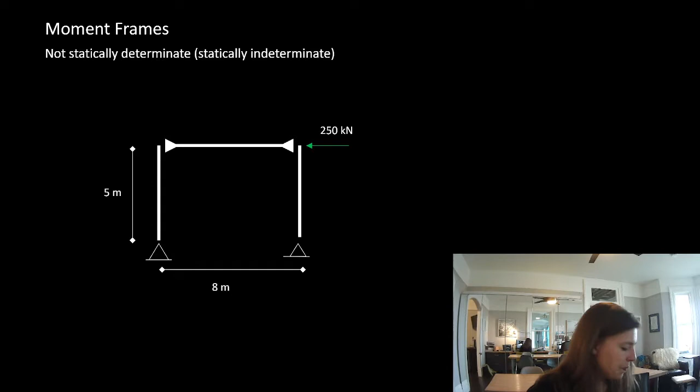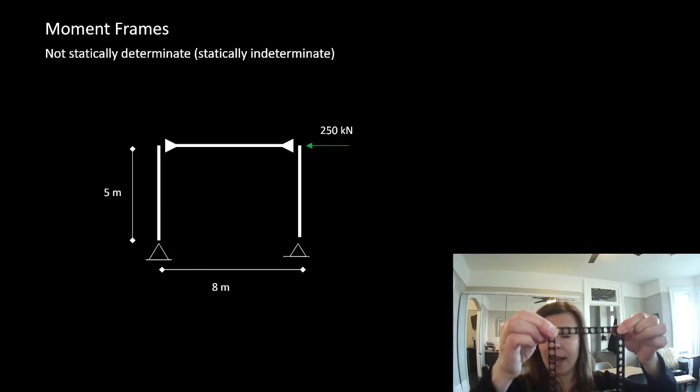If this was our braced frame, say we take this brace out. That's not very good, because if this is what's holding the building up and we take it away, we've got a problem. So what we need to do is essentially glue these joints together. Right now these are pins, and you can see how they don't prevent rotation, the angle changes. So we're talking about gluing here and here, and if we glue those together, we have a moment frame now. I don't have a way to actually build one where those get glued together to prevent rotation, but that is a moment frame.

We have 250 kilonewtons applied to it, and 4 reactions at the bottom: two gravity reactions in the y direction, but also two in the x direction. We only have 3 equations available. For the braced frame, there was no way to have an x component at that base, so we technically only had 3 unknowns since those could only take axial loads. Here we have a moment connection, so we'll actually have 4 unknowns down here, meaning this is statically indeterminate - we have more unknowns than equations.

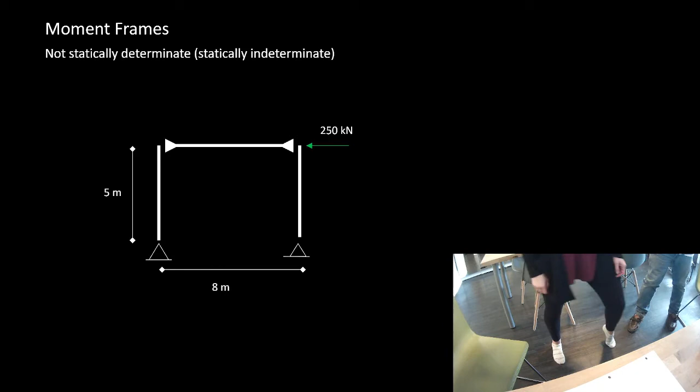Now if we look at this, what can you guess is the issue here? Actually Dave, can you do me a favor, can you push me right here? If Dave's pushing me, I can feel both of my feet are engaged. If I went up on my tippy toe on this side, things start to get a little bit different. Thank you, I thought that was going to be more effective, but it was not.

But you know that your feet are sharing out that friction load. Think of this X reaction as a friction load here. There might be something more physical there, but it's the same idea.

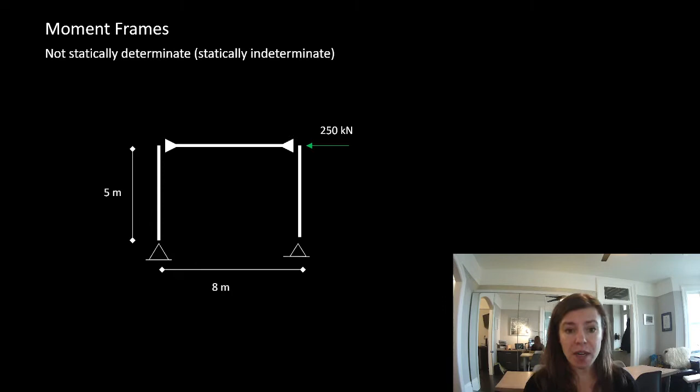We're going to make an assumption that the X component of these reactions are equal. As an experienced engineer, I'm telling you that most of the time that is true, and I'm going to show you using modeling software later in this lecture when it isn't true. This problem is probably true, but we're going to start with the base assumption that it is. I know you're thinking: you're telling us to assume something is true, then later you'll tell us when it's not. Hopefully it'll be clear when I explain what makes it not true. Most of the time it is true, and in a little bit I'll explain when it's not.

So let's go through what we know about solving problems with method of sections. We did this as a braced frame a few weeks ago, and now we're going to solve it with the moment frame.

Let's take a look at our problem set here. I need to put my hair up because it's getting absolutely ridiculously long, and I'm lazy, so I don't go to a hairdresser ever. All right, you guys are all gonna forever think about that wacky teacher that talked about all of that nonsense. I guess it's something, right?

Let's draw out our frame here. We know that there's a moment connection here. When we draw this pin, we tend to leave a little bit of a gap, but we know this is a moment connection. For a moment connection, we'll often draw solid filled triangles, just to remind ourselves that they're glued together here.

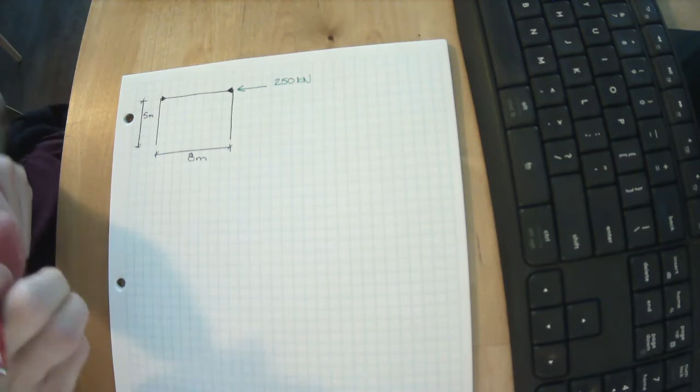We know we have two pinned reactions here: RY1 and RY2. And we know we have two X reactions here, RX and RX, and we are starting with the assumption that RX equals RX. We're dividing the reaction equally between these two. We're saying we think these two things are going to share the load equally, whatever that load is, we're saying we think we're going to have those shared equally. This is our assumption.

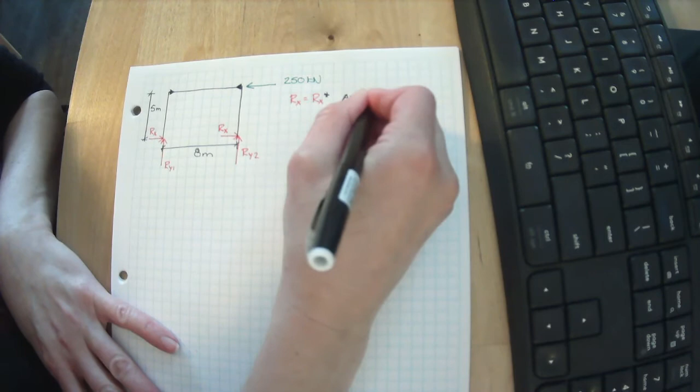This is going to allow us to only have three unknowns, because look, we have RX and RX, RY1 and RY2, so we only have three unknowns, which means we can make use of our three equations. I know, crazy, I'm telling you to take this on trust a little bit. There are ways to do this problem solution set not assuming these share out equally, and I'm going to show you that under certain circumstances, if we go through that long, hard, complicated way, we will see that in certain circumstances they are equal to each other.

So let's go through - what's the very first thing we do with this? Right, we solve for our reactions.

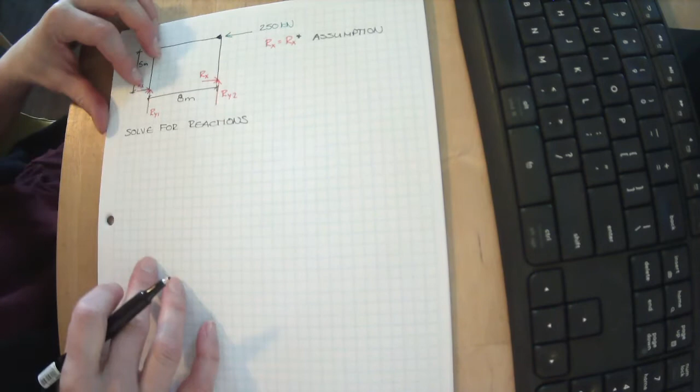Sum of the forces in the X direction, where everything going in that direction is positive, and we want this to be in static equilibrium, which means it's not sliding back and forth, so the sum of all the forces has to be zero in that direction. We have Rx plus Rx minus 250 equals 0. So we have 2Rx, bring that over, make it positive, divide the 250 by 2, and we get Rx equals 125 kilonewtons.

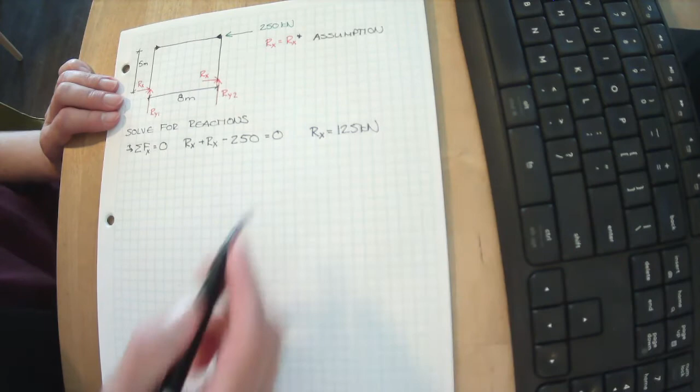Essentially, that's the assumption we made. We said we're going to share that load, that 250 kilonewtons of sliding, out as a reaction equally on each side here.

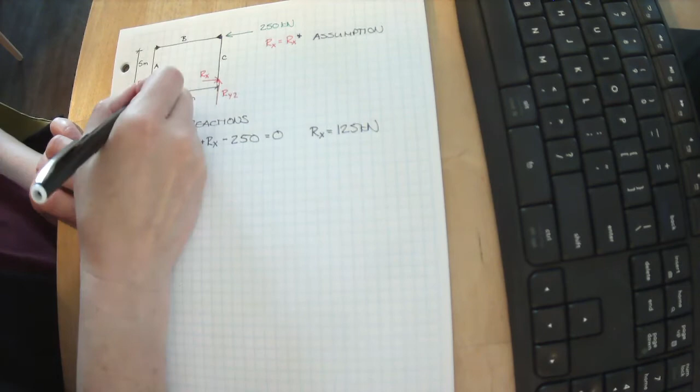Now let's sum the moments about the z-axis where everything spinning in that direction is positive. Do you know what I didn't do here? What I like to do with trusses or braced frames or moment frames is label out my members. So let's call this member A, this member B, this member C. We'll call this node 1 and node 2. This is RY1, RY2. And let's call this node 3 and node 4. That's just to help us think of that as an accounting process, to help us keep track of our numbers because it's so easy to lose track of things. You've seen me do it, I'm sure you guys have done it.

It's a very frustrating feeling when you've done everything right, but made some silly little mistake—you get the wrong answer not because you don't understand the process, but because of a simple numerical mistake. Unfortunately, because everything is online, it's hard for me to award points for that. Normally, I used to go through and visibly look at assignments and exams for those problems, but being online, that's hard to do. So we have to be really precise, more like it would be in the real world.

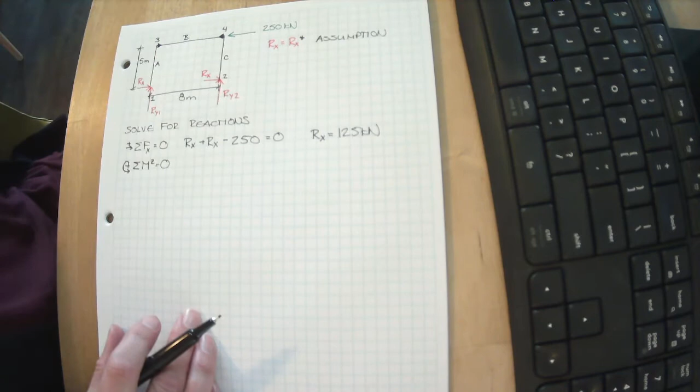Let's spin about node 1. Let's assume we're putting our imaginary thumbtack right here—that's where it is. RY1 passes through our thumbtack, and RX passes through our thumbtack too, leaving us with 250 kilonewtons and RY2 trying to make this spin. The 250 kilonewtons is trying to spin this in this direction.

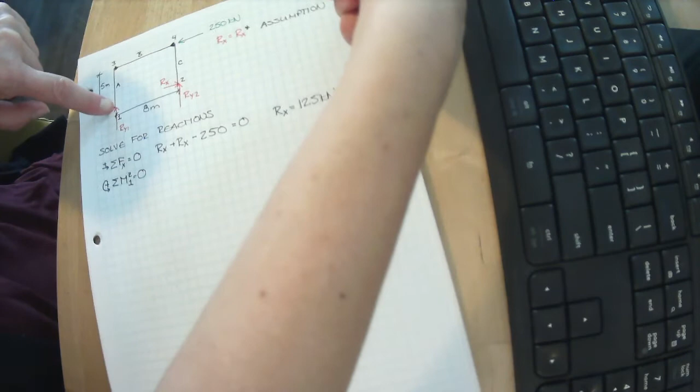Let's follow the path of the 250 and see how close it gets to our node. It follows along this path, going along this track, and gets 5 meters away from our thumbtack, which is right here. So it's trying to spin in that direction. Curl my fingers in the direction it's trying to spin it, and my right hand tells me if my thumb is in the positive direction, then it's a positive moment.

So plus 250 times 5 meters. I also have RY2 trying to spin this—it's trying to spin it in that direction, which is positive, so plus RY2 times its distance away, which is 8 meters.

We only have one unknown in this problem. We can rearrange this and solve for RY2: 250 times 5, bring it over, make it negative, and divide by 8. That gives us 250 times 5 divided by 8, minus 156.25 kilonewtons. The minus tells us that we assumed wrong.

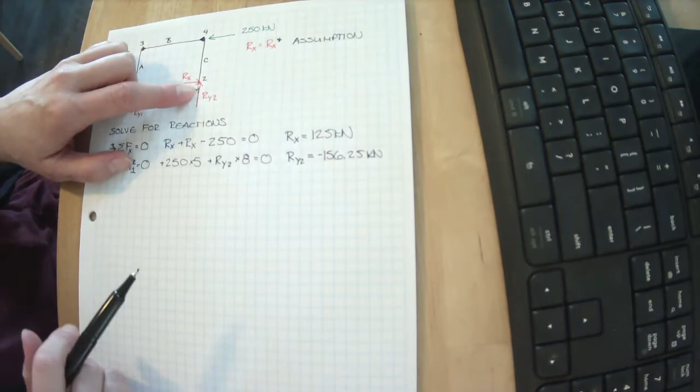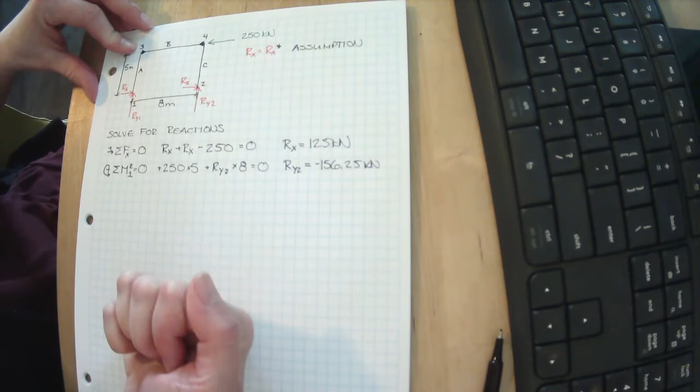We assumed that this was in compression right here, or that this reaction was a supporting reaction. Instead, it looks like it's trying to hold it down—this is trying to kick up, and so we're pulling down at this spot. Again, if you stood up and had someone push you, you could feel that with your feet.

Let's now sum our forces in the y direction with everything upwards being positive, and we want this to be in static equilibrium—we don't want it to move up and down, so the sum of all those forces must be 0. There's 3 ways to say the same thing. We have RY1 going upwards, we have RY2 going upwards, but we've calculated that it's minus 156.25.

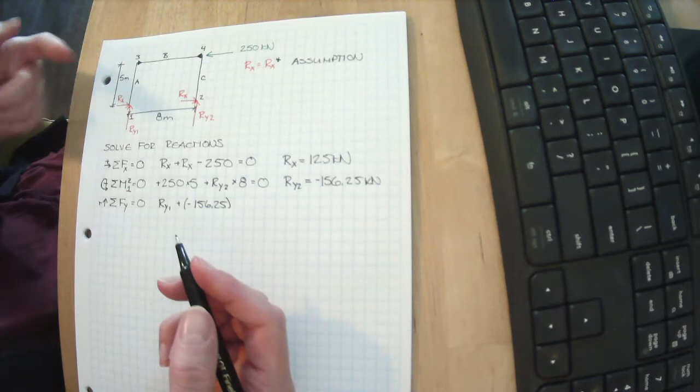That's it, it's only our reactions. So that means RY1 equals plus 156.25 kilonewtons. So this load gets shared out between those two as a reaction in the x direction.

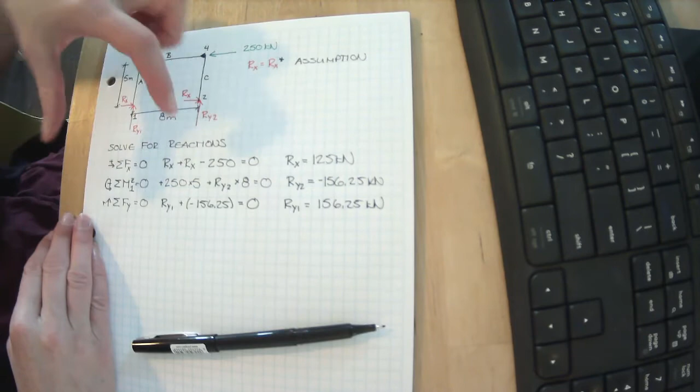And then here, this side's trying to kick up, this side's trying to push down, and they're equal and opposite forces.

Sorry, thank you. No problem. The students all thank you. Say thank you, Dave. Okay.

Now let's start the fun part—let's start method of sections. Let's do method of sections, cutting through member A, some unknown distance through member A.

There's our member A. We know at A we have a reaction of 156.25 kilonewtons and 125 kilonewtons. And that's it—those are the only applied loads if we're cutting here.

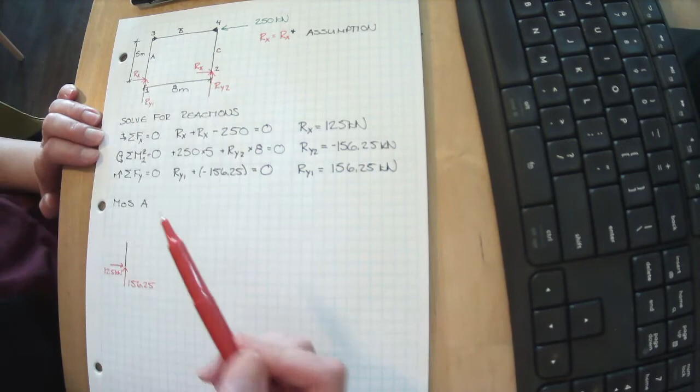I'm going to work around this frame, cutting through A, then cutting through B, and cutting through C. You could go the other way—that's totally fine, you'll end up with the same answers. But I'm lazy and I like to have a method, so I'm going to cut through A and get rid of all of that, then cut through B and get rid of all of that. Basically, I'm always going to keep the left-hand side.

But we know that something must be holding this in place. This is in static equilibrium, which means this must be in static equilibrium. So what's happening at this point right here internally on this member to make sure it's not flying off in space or spinning? Something is happening there.

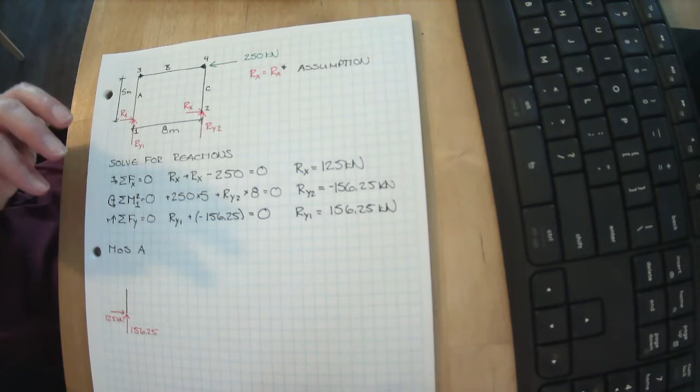So what could be happening there? We know that there could be 3 different internal forces: shear, moment, and axial. In trusses, I told you we were only looking at axial loads, and in our beams, we were only looking at bending and shear. This one's slightly more complicated in that we can have all 3 things happening in it.

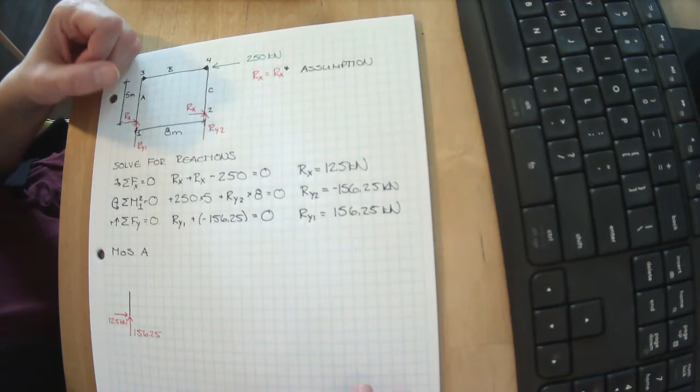How would you know when to do that? Well, some of that comes with practice, but I'll tell you: if you have moment connections on things with a force in the other direction or along its length, you'll end up with 3 types of forces internally on things. That's beyond you to figure out right now.

I'm telling you we can have all 3 on this. I always draw my unknown axial force as a tension force, so that's my unknown tension A. I always draw my unknown shear like that, and I always draw my unknown moment spinning in the positive direction. So I have 3 unknowns here. Lucky for us, we have 3 equations to solve this.

All right, let's start with summing the forces in the y direction, where everything upwards is positive. We want to know what it takes for this to be in static equilibrium, or for the sum of all the forces to be 0.

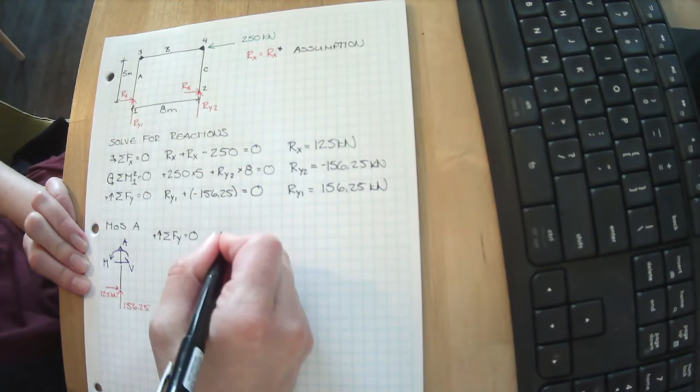Okay, well, we have A going upwards, and we have 156.25 kilonewtons going upwards, and that's all that's going in the y direction. We can rearrange this, and A equals minus 156.25 kilonewtons. We assumed A was in tension, so this negative tells us we got it wrong, and A is actually 156.25 kilonewtons in compression. I think intuitively you can understand that.

If you were standing here with your legs like this and someone pushed on you, you can feel that this leg is pushing down and this leg is trying to lift up, meaning this would be in tension and this would be in compression. So I think intuitively that matches what you'd expect. This is why, before you start solving anything, you should take something and play with it, see what you think is going to happen.

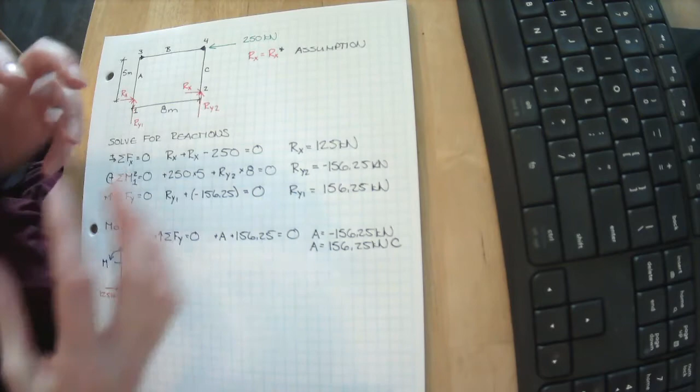Okay, let's sum our forces in the x direction, where everything going in that direction is positive. We want to know what it takes for this to be in static equilibrium, or for the sum of all the forces to be 0.

Okay, well, we've got our unknown shear in the positive direction and 125 kilonewtons. We can rearrange this, and V equals minus 125 kilonewtons.

Remember, for shear, positive or negative doesn't really have much meaning. It's important for tracking our data, but when we're looking for maximum values, the absolute value is what we care about. With axial, it tells us whether tension or compression is what we have, which is really important. You're going to see that next term, when we do our capacity of things, that axial, whether it's tension or compression, has a real impact on things, but positive or negative shear doesn't.

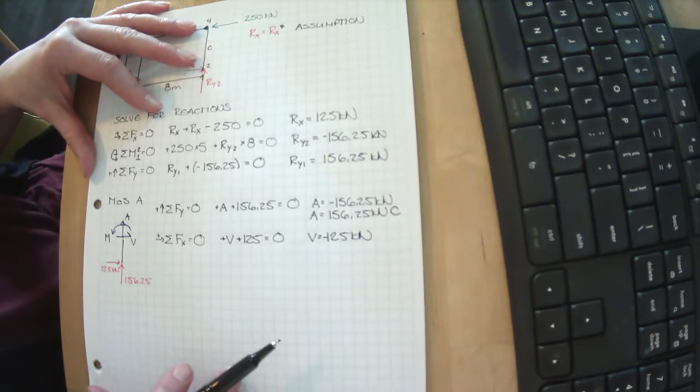We like to keep track of it while we're solving our problem though. All right, and the third one: let's sum our moments about the z-axis, where everything in that direction is positive, and we want to know what it takes to be in static equilibrium.

And we have cut this some distance x. Being lazy, I always solve my method of sections at the cut, so I put my thumbtack at x. So I'm cutting this at x, and I'm putting my thumbtack here. Well, my unknown shear passes through it, so it doesn't cause it to spin.

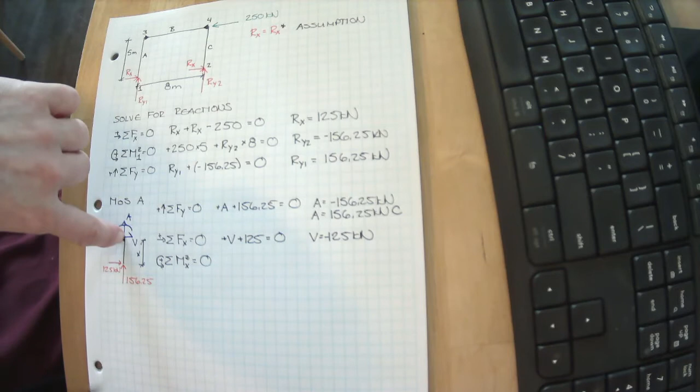A passes through it, and 156.25 passes through it. So I've gotten rid of A, this value, and V, because they all pass directly through the point of my thumbtack. To be a moment, you need a force and an eccentricity, or a distance away, so those ones cannot cause a moment about a thumbtack right here.

What we're left with is 125 kilonewtons, trying to spin our element in that direction, which is positive, and our unknown moment trying to spin it in a positive direction. So we have plus moment plus 125 times... remember, to be a moment, you need a value and a distance. Well, our distance is x.

We can rearrange this and solve for m. M equals minus 125x kilonewton meters.

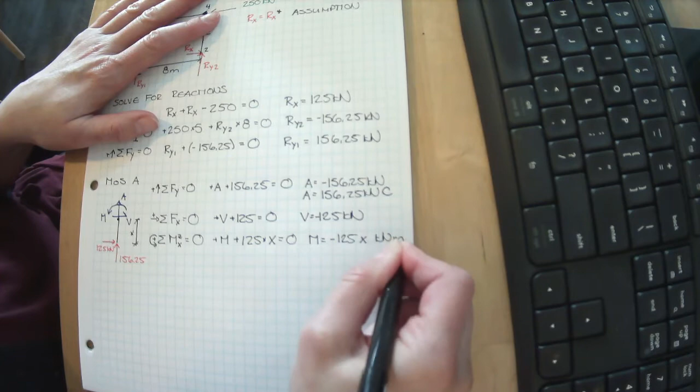Well, let's just plug in a few values here. What is m at 0? Well, m right here at x equals 0, 0 times 125 is 0. M at 2.5 — if x was 2.5, we have 125 times 2.5, so minus 312.5. And what is m at 5 meters?

Remember, this thing could be 5 meters long.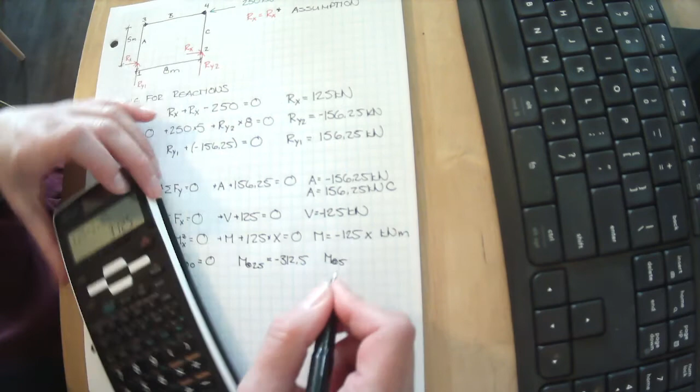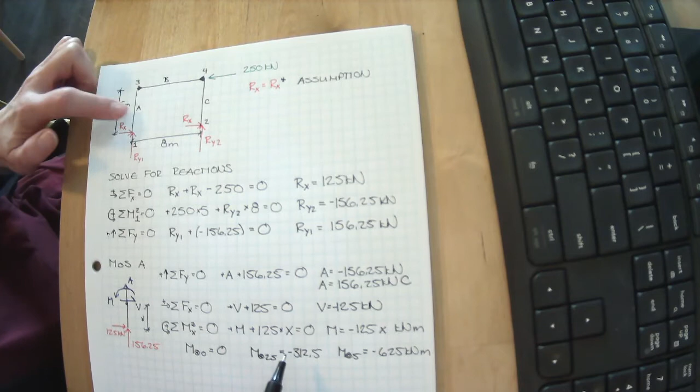125 times 5 is minus 625 kilonewton meters. So we now know what the moment is anywhere along member A, and we can see that it's highest right here where it connects to member B. Remember, if there's a moment there, it has to go somewhere, meaning there needs to be a moment connection between these two things. So now we know we'd have to design this connection for at least 625 kilonewton meters.

Let's do our second section. Let's do method of sections on B. We're going to cut some distance x along member B now. I'm going to cut this at some unknown length along B. This is 5 meters, and this is distance x.

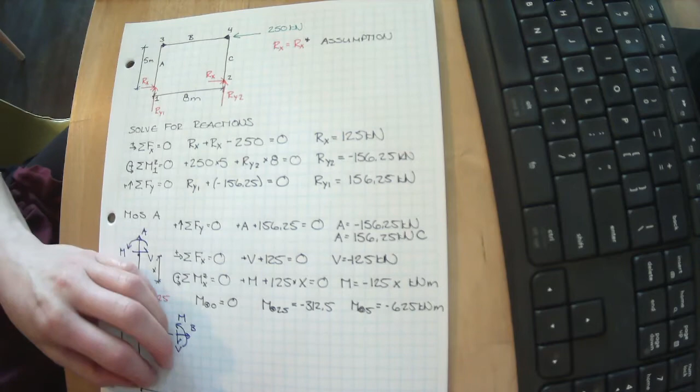We know that we have a reaction here of 156.25 and a reaction here of 125 kilonewtons. And there are some unknown internal forces here: an axial force, a shear force, and a moment. Those three things are unknowns. We know that this object as a whole isn't moving or spinning, so this section of it can't be moving or spinning because the other part of it is holding it in place. So internally, there must be something happening on that member, and this is how we can find those internal forces.

Let's sum our forces in the y direction, where everything upwards is positive. We have 156.25 going upwards, and we have V going downwards. Those are the only things in the y direction, so it's negative. We can rearrange this, and the shear along B is 156.25 kilonewtons. It's independent of the length of B, so everywhere on B, the shear is 156.25 kilonewtons.

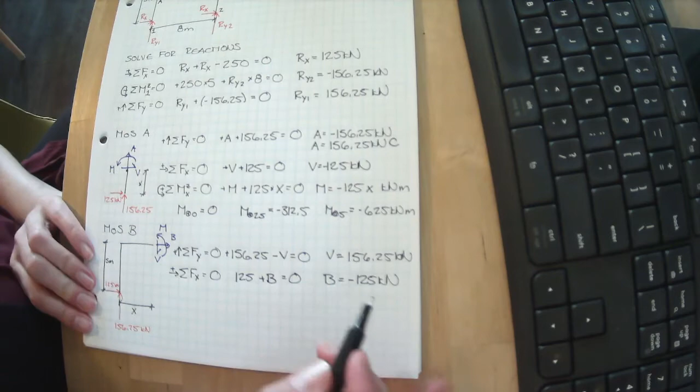Let's sum our forces in the x direction. We've got 125 kilonewtons that way, and we've got B going in that direction, and those are the only things in the x direction. So we can rearrange this, and B equals minus 125 kilonewtons. We always assume everything's in tension when we're drawing it, so a negative value tells us we assumed wrong - that's a handy way to remember negative always means compression. So B equals 125 kilonewtons in compression.

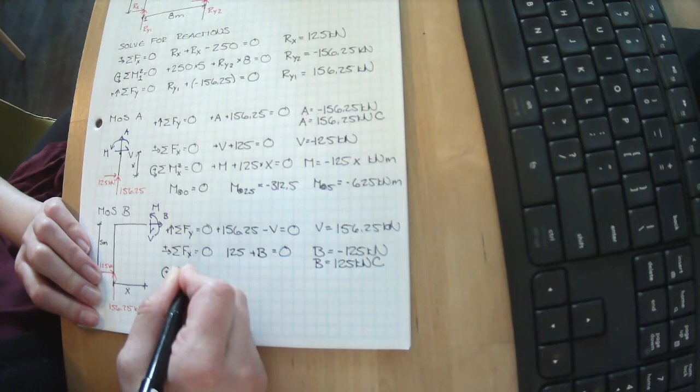We have one last handy dandy equation for us. We need to find that internal moment. So let's sum the moments where everything spinning in that direction is positive. We're going to spin it about the z-axis, and we want this to be in static equilibrium. Let's pick point X to put our thumbtack - I'm lazy, I always do it at my section cut. If I put my thumbtack right here, shear passes through it, so it doesn't cause it to spin. And the axial load in member B passes through it, and it doesn't cause it to spin. So I have my unknown moment, which is what we're trying to solve for.

So plus m, putting my thumbtack here. We have 125 kilonewtons trying to make it spin in that direction. Curl the fingers of my right hand in the direction it's trying to spin, my thumb tells me that's positive. So plus 125 times - this is the line of action of that 125 kilonewtons - it passes 5 meters away.

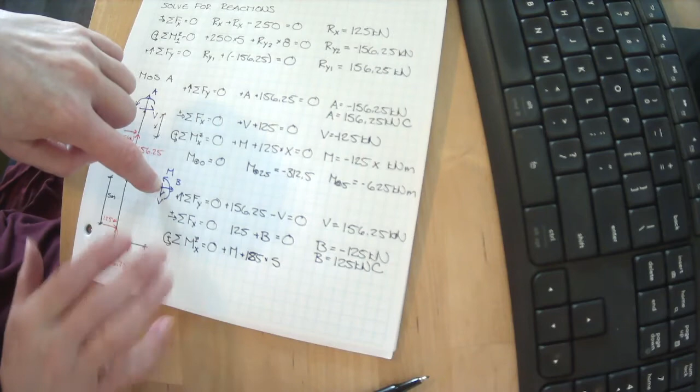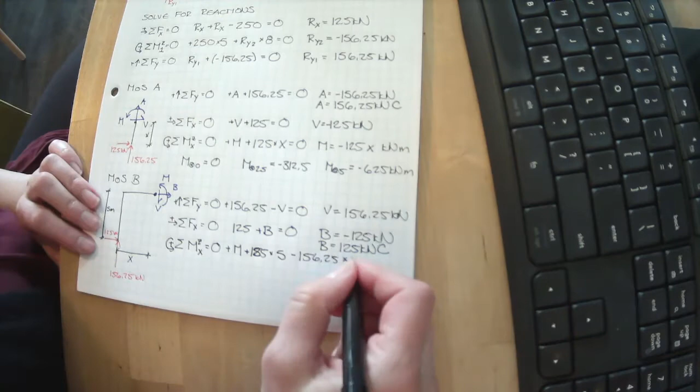Then I have 156.25 kilonewtons trying to spin it in that direction. Curl the fingers of my right hand, point my thumb - it's pointing into the page along the z-axis, so that tells me it's a negative moment. So minus 156.25 times x away, that's the distance - the closest it passes is along this plane right here. So times x. We can rearrange this, and we can solve for m equals 156.25x minus 125 times 5, or 625 kilonewton meters.

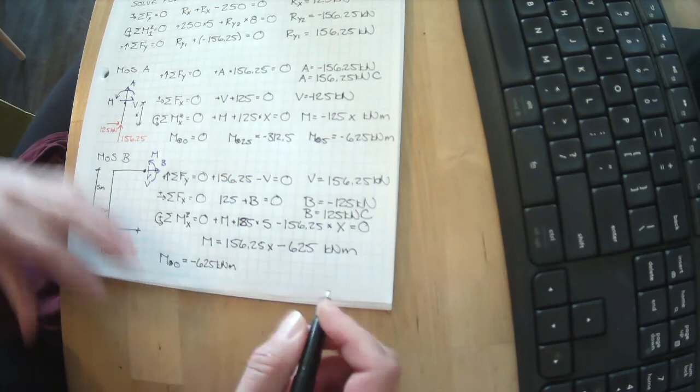So our location has an impact on moment. Let's test it at a few spots. What's the moment at x equals 0? If x equals 0, we have 156.25 times 0 minus 625 kilonewton meters. What's the moment at x equals 4 meters, halfway - remember this was 8 meters long? What happens at the midpoint here? 156.25 times 4 minus 625 equals 0. We have 0 moment at the midspan of that member.

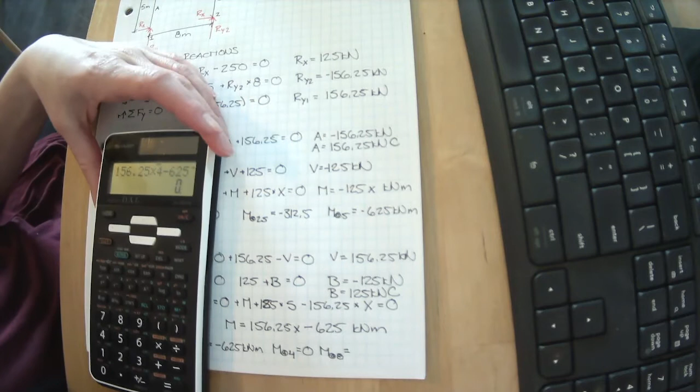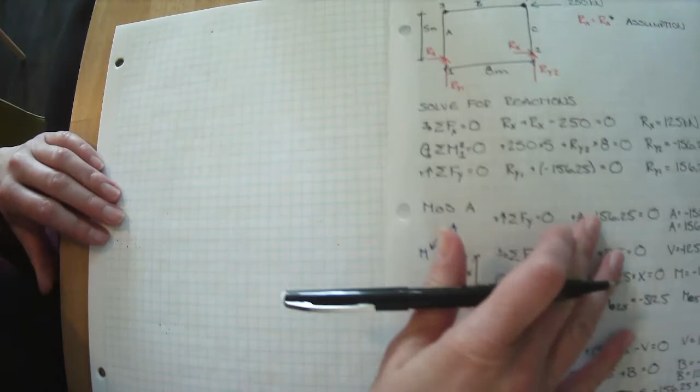Let's check it at x equals 8. So let's see what happens when we have 8 as our distance x. 156.25 times 8 minus 625 gives us 625 kilonewton meters. So we've got some information now for what the internal forces are along member B. We have one more member left - we need to know what happens along member C. So let's put this right here so we have quick access to it.

Method of sections on member C. All right, 1, 2, 3, 4, 5. 2, 3, 4, 5, 6, 7, 8.

And we're going to cut it somewhere along member C. This is 8 meters, this is 5 meters, and this is our distance x. Remember, I'm going around it like this, cutting it. So this is x equals 0, and this is x equals 5, because I've gone through and cut it in that direction.

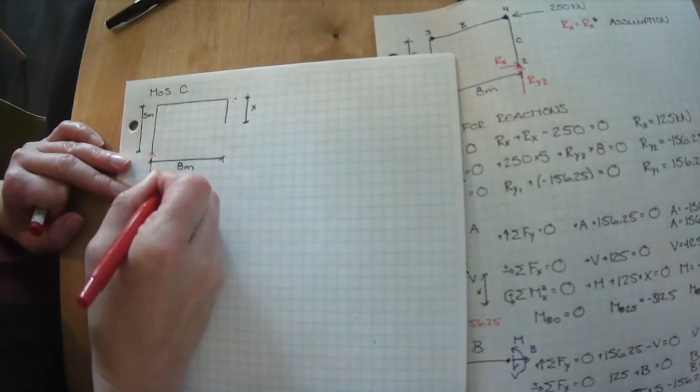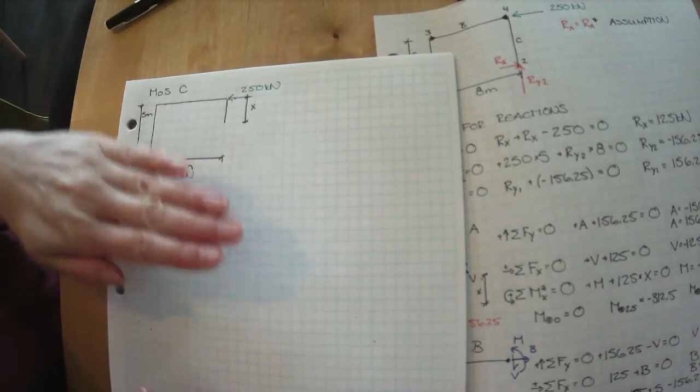We know there is a reaction here of 156.25 and a reaction here of 125 kilonewtons. And we've cut past the applied load now, so we know there is also 250 kilonewtons of applied load on this moment frame. And this is not sliding in space or spinning because this whole isn't.

So what's holding this portion in place? Well, the rest of this is what's holding it in place. So there must be some internal reaction or internal forces holding this in place. I always assume everything is in tension, so an unknown axial force of C. We have an unknown shear force, V, and I always draw my unknown moment in the positive direction. So now we can solve for these internal forces for anywhere along member C.

Let's do the same process. Let's sum our forces in the x direction with everything going in that direction being positive. We want to figure out what it takes to be in static equilibrium. Well, we have 125 kilonewtons going in the positive direction, we have 250 kilonewtons going in the negative direction, and we have our unknown shear going in the negative direction.

We can rearrange this. V equals, bring V over to the other side, 125 minus 250, we get minus 125 kilonewtons. Remember, for shear, we don't put a lot of stock in positive versus negative, but we need to be able to keep track of things. So we'll keep track of it, but when we ask about maximum values of shear, we don't care about positive versus negative. It's the absolute value we care about.

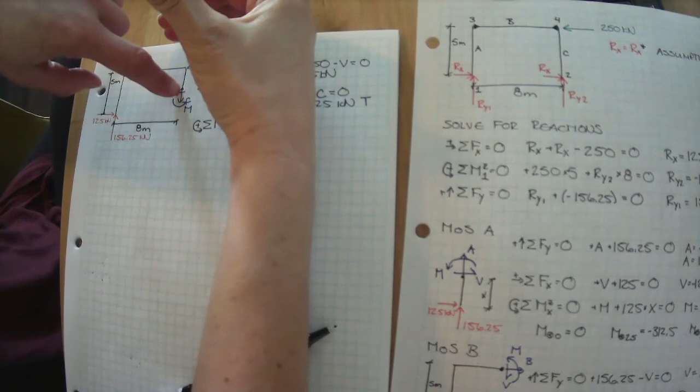So let's start with our unknown moment. We always tend to draw it in the positive direction, so plus M. We've got our 250 kilonewtons trying to spin it in that direction. Curl my fingers, my thumb tells me that it is spinning in the positive direction. So plus 250, and it is x distance away. I'm going to write this down here just to give us a little more room: M plus 250 times x.

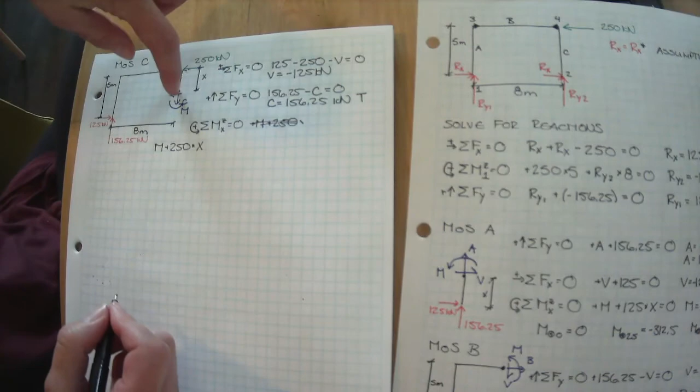We have our 156.25 trying to spin it in that direction. The thumb of my right hand tells me that's the negative direction. So minus 156.25, and it is taking place 8 meters away, so times 8 meters.

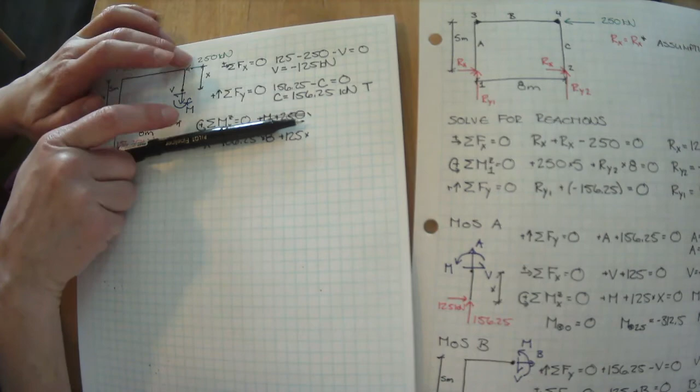Okay, we have our 125 trying to spin it in this direction. Curl the fingers of my right hand, that tells me it's the positive direction. So plus 125 times this distance. Look, it passes this distance away. So if that's the line of my force, it's passing that distance away. Well, that distance is 5 and that distance is x, meaning that distance is 5 minus x. And those were all the things trying to make it spin: 1, 2, 3, 4 things. Okay, it looks like we can do some math here. All right.

M equals, let's bring everything over to the other side: minus 250x plus 156.25 times 8, so plus 1250, minus 125 times 5, which is 625, plus 125 times x. I multiplied this out, but then brought it to the other side of the equation, so it changed the signs. So 125 times minus x, bring it over, became positive 125x. We can simplify this: M equals minus 125x plus 625 kilonewton meters.

Let's see what that means at various points along the length of this. Let's check M at x equals 0. Remember, this is 0 because we're cutting along this length, this is the length we're cutting here, so this is distance x. That's when it's 0, that's when it's 2.5, and that's when it's 5 meters.

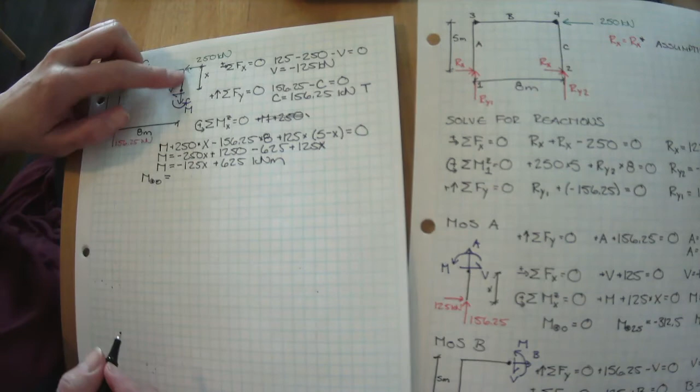At x equals 0, which is right here, we have minus 125 times 0 plus 625, so 625. M at 2.5: we have minus 125 times 2.5 plus 625, gives us 312.5 kilonewton meters. And then M at 5 would be minus 125 times 5 plus 625, gives us 0.

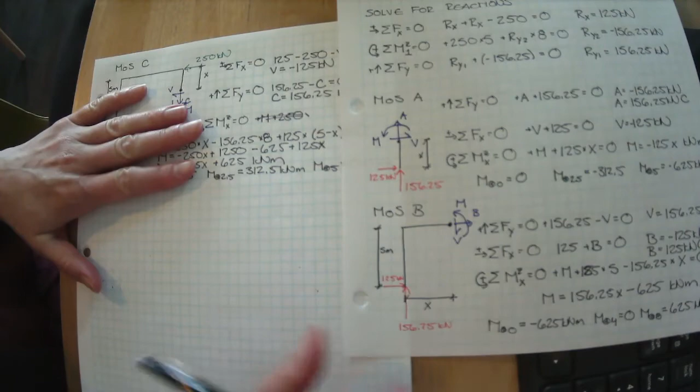Okay, so we've got a lot of data about what's happening internally on this frame here, this moment frame, but I find that a little bit difficult to look at. Let's maybe draw a little set of summary diagrams here.

Let's draw our free body diagram. We'll make this one our free body diagram, we'll make this one our axial force diagram, and we'll draw our shear force diagram. I'm just going to put a note that I'm going to draw that in kilonewtons. And we'll draw our bending moment diagram, and that's going to be in kilonewton meters.

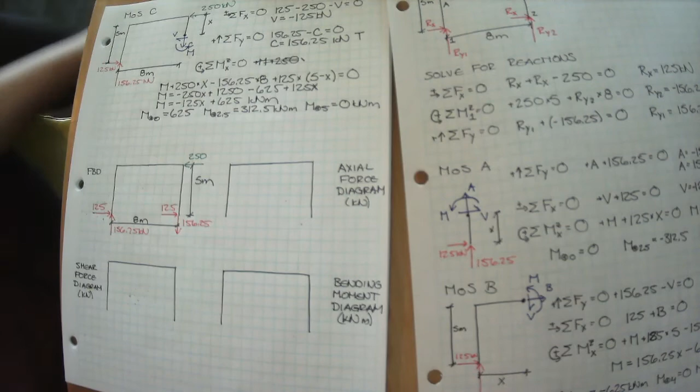Okay, so this tells us what's being applied to our frame here, and then we can start drawing our diagrams. Our axial force diagram for our columns: this column was 156.25 compression. Our beam was 125 kilonewtons of compression. So member A was 156.25 kilonewtons of compression, and member B was 125 kilonewtons of compression.

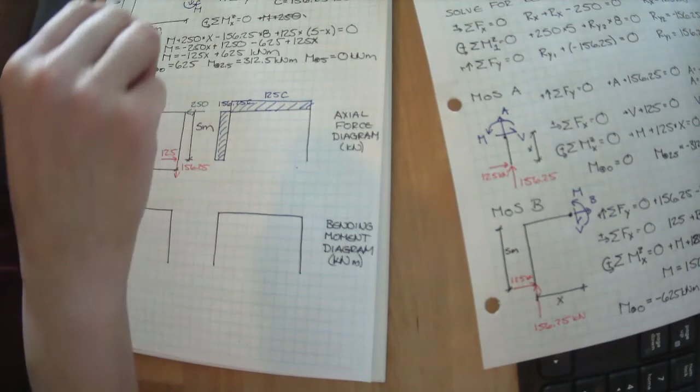And then I'll often change the color between compression and tension so it's visible at a glance. So 156.25 in tension, that just makes it really easy to see what's happening quickly. So both of these are in compression and that's in tension.

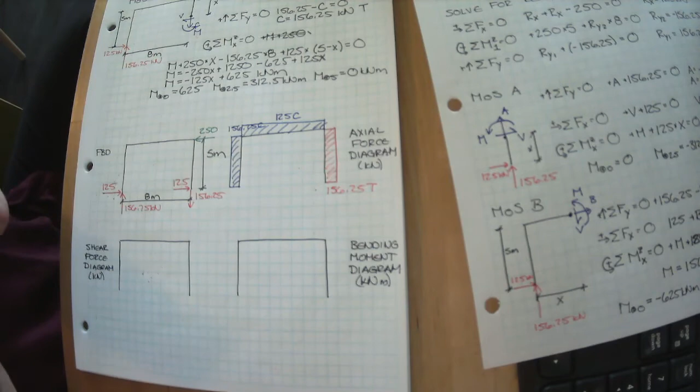Okay, let's draw our shear diagram. Member A had 125 kilonewtons of shear on it. Remember, for shear, we need to keep track of positive and negative for solving our problems, but once we have it, we don't really care if it's positive or negative. Everywhere along member B, the shear was 156.25, and in our other column, we also had a shear of 125. So that's our shear force diagram.

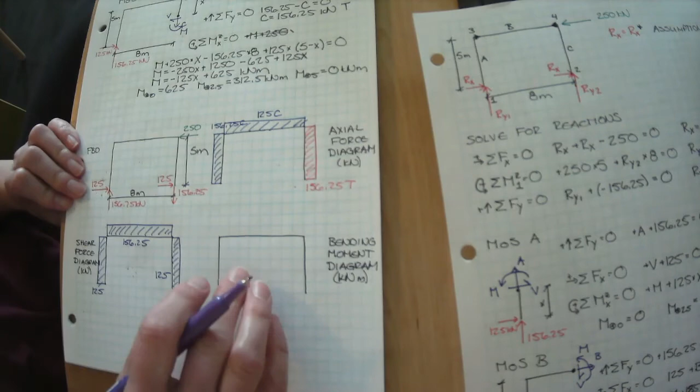And then over here, we have a bending moment diagram. On member A, we went from 0 to 312.5 to 625. Now, it was actually minus 625. Again, positive and negative moments mean a lot next term when we talk about top chord versus bottom chord of certain members. Right now, for this, it doesn't mean too much, but I'm going to keep track of it so you can see it.

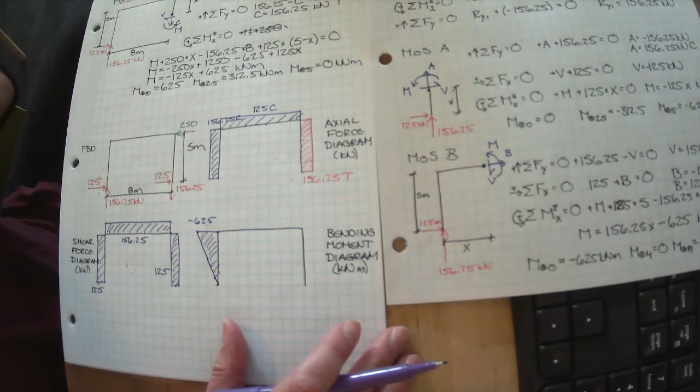The top chord, or the top member, we went from minus 625 to 0 to plus 625. And then our final member was 625 at x equals 0, and we went down to 0 moment at x equals 5. So as we wrap around this frame, we now have an image of what is happening everywhere on this frame.

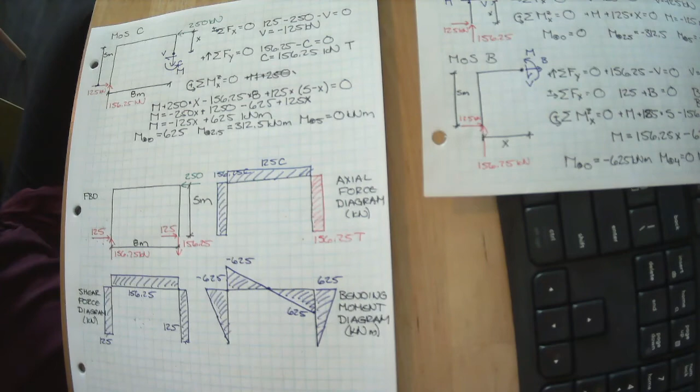So it looks like our columns are always doing something similar to each other, while our beam switches up the shear and axial forces. At a quick glance, somebody can see a lot about what is happening to this frame, which can be really handy when you're trying to make decisions about a large scale set of problems. Looking at all of these numbers, we need all these numbers to solve it, but it's hard to have a major takeaway. These images start to give us something that really lets us have a takeaway from our problem set.

So there, we solved this system as both a braced frame and a moment frame. So let me turn this back up. Well, first let me make this small.

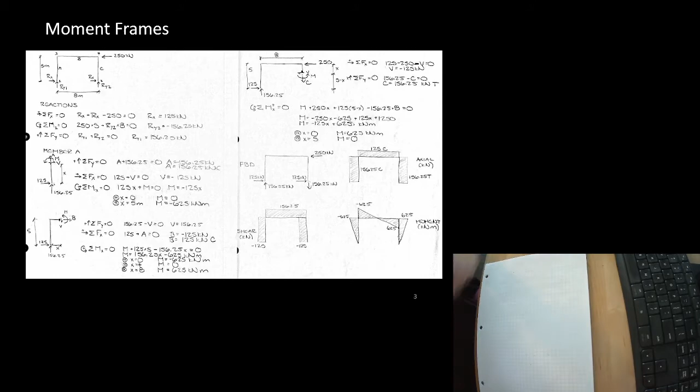And then we'll bring this back up. Okay, all right, let's take a look at this.

So, moment frames. We've now solved this frame as a braced frame and a moment frame, and we saw that the braced frame only had axial forces in it, where the moment frame had axial, shear, and moment that we had to design for. Let's see what impact that has.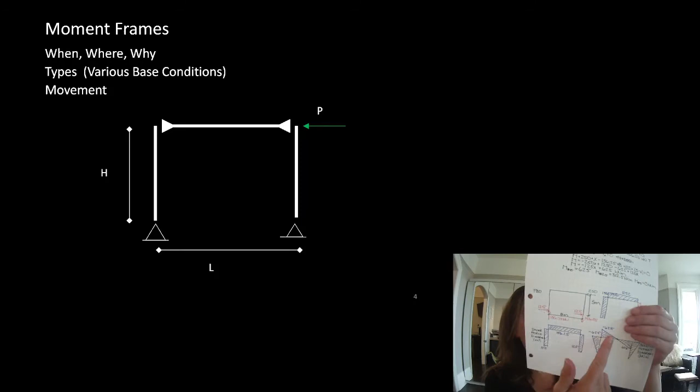Now, you guys don't know how to check the capacity of things. Next term, you'll be able to say, okay, for this member right here, I know I need a member that can handle 125 kilonewtons of compressive force, 156.25 kilonewtons of shear, and 625 kilonewton meters of moment.

But you guys don't know how to do that yet. You don't know how to pick the appropriate member. But I want to give you guys some takeaways about why moment frames are a last resort and what you can do with them. So I've gone through and taken this exact frame problem we've looked at, and I'm going to show it to you worked out with modeling software that I use under a series of conditions. So let's take a look.

So this is what I input in my modeling software. I could do all this by hand, but this does it really fast. So here's our braced frame. These little circles are just a shorthand way of the modeling software reminding me that those are pins.

So there can be no moment transfer between any of these things. No moment transfer can happen here because this is pinned to this column. These are drawn as pins, so this can only take axial loads, whereas this one, they don't show the solid triangle, but because there's no little dot, it's telling us it's moment connected, but it has pinned conditions at the base. So that means no moment can be transferred out down here.

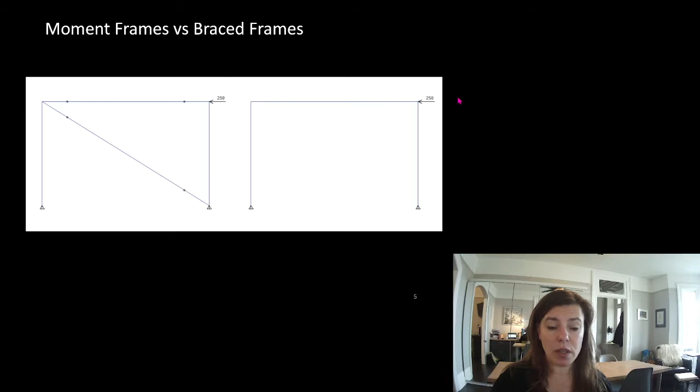They are the same dimensions, 8 meters across and 5 meters high, and they both have the same applied load. We just went through and solved these problems, and we saw that we had a reaction of all 250 kilonewtons in the x direction over here. On this one, it was divided out equally.

And we got equal and opposite 156.25 kilonewton reactions for these two things. Look at this, 124.99 and 125.00. We cheated and started with the assumption that those were equal, but that was a shorthand way of solving an indeterminate problem. What the software did was go through and check it at a series of assumptions to hone in on the one that works out. It brought into account the stiffness of the system. That's way beyond what we're going to do, but I'm going to show you some fallouts of that going forward. But you can see this matches pretty darn close to our assumption.

Right? They didn't make an assumption, they did it in a series of problem solutions. That said, they came out with our exact assumption, pretty darn close, like a slight rounding difference between them.

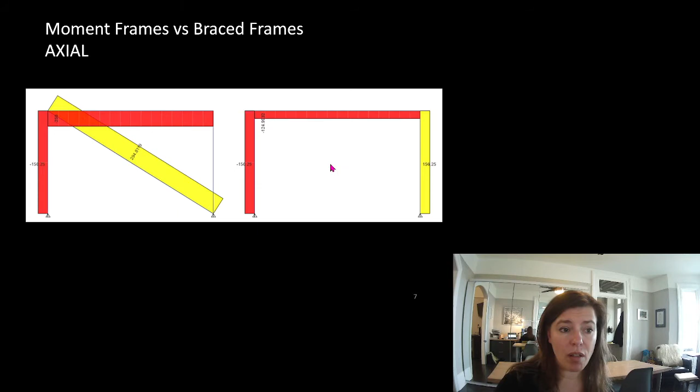So this is what we did by hand. The modeling software gives us compressive values of 250 in this, 156.25 here, and a tensile force of almost 295 kilonewtons in the brace. And then these match the axial forces we just solved. Here's our shear that we just solved. Remember, the braced frame didn't have any.

And here are our moments. Again, because they solved this not making the assumption that these were shared equally at the bottom, their moments are pretty darn close to ours. Like if I told it to round to the nearest kilonewton, the answers would be the same as ours. So there's just a fraction of a difference between ours and solving this as an indeterminate problem, just because those base shears were the tiniest little bit different.

All right, if we found members that worked for this, which is what we want to do, these two frames, for those shear force diagrams, moment diagrams, and axial force diagrams, these are the members it would take for the reduced capacity to be greater than the factored load for all of those things. What are those members? You don't care too much about that. You can see this is a lot bigger than this. And then look at this.

This is how much the systems weigh, right? If what we care about is having the cheapest system, this one—and you could use weight as a pretty good indicator of cost, which is how people price out projects during the beginning phases. That's exactly what they do. They add up all of the steel, figure out how much it weighs, and then apply a cost to it.

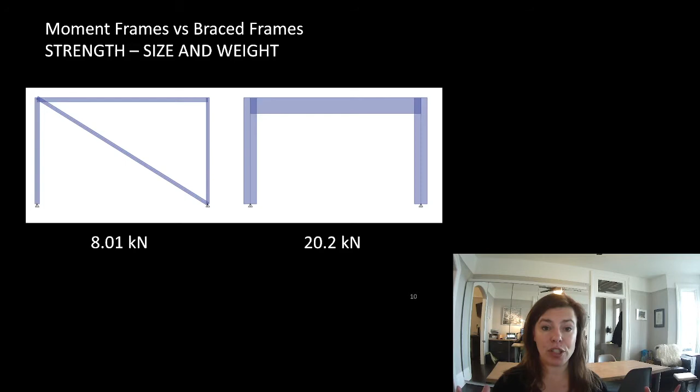Let's look at the deflected shape of these two things. Now, I'm going to show you a deflection where I've increased the scale so you can visibly see it. These are both at the same scale.

This frame deflects 8.3 millimeters, and this frame deflects 56.3 millimeters. Our height is 5 meters, and our deflection limit is height over 500, or 10 millimeters.

So this one works—just meeting the strength requirement, we also met our stiffness requirement for a braced frame. Our moment frame, however, looks like it's 5 times over for our stiffness criteria.

Now, I have said that stiffness is a strongly suggested criteria, meaning if you don't have a good reason not to meet it, meet it.

I would say probably 90% of lawsuits come over damages to finishes. So if you can say 'I met all of the criteria in the code,' you'll be safe, you'll be fine. If you choose to ignore that criteria and there's damages to finishes, you might find a client that can come after you and sue you for something.

So if you don't want to meet those criteria, you have to be very open and honest, and the owner has to understand the risk they're taking there.

So if this was just an outdoor pavilion, maybe we don't care about that criteria because there's nothing that can get damaged—like just a pergola out in a backyard. Maybe we don't care, right?

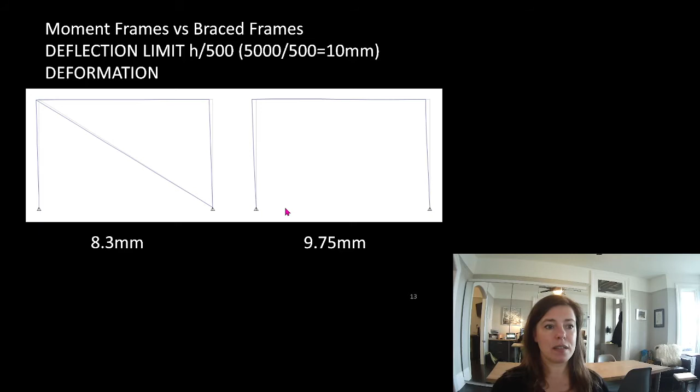But we've now met our deflection criteria, so this now meets stability, strength, and stiffness. Both of these meet strength, stiffness, and stability criteria, but this one now weighs more than 5 times the other—way more expensive. Plus, moment connections are expensive.

That alone has a cost and complexity with it. So it's not just more than 5 times—it's 5 times plus a more difficult connection.

So here's a huge takeaway: moment frames are bigger, they're heavier, and they deflect more. Even in that other case where we met the criteria, we still had more deflection—the brace frame performed even better than the criteria demanded.

So we do not start with moment frames—start with a brace frame. If you can find bays where you can put a braced frame, do that. It's going to make everyone's life simpler.

If you have no choice and you have to use a moment frame, that happens—we use moment frames, they exist and they're possible. But just try to be smart about when, where, and why you're using them, okay? I can guarantee you I'm going to ask you this question on the exam.

So let's take a look at what things we can do to a moment frame. This is what we had with our original moment frame that met strength, stiffness, and stability criteria. From now on, I'm going to try to meet those criteria. This weighed 50 kilonewtons, and I had pinned supports here.

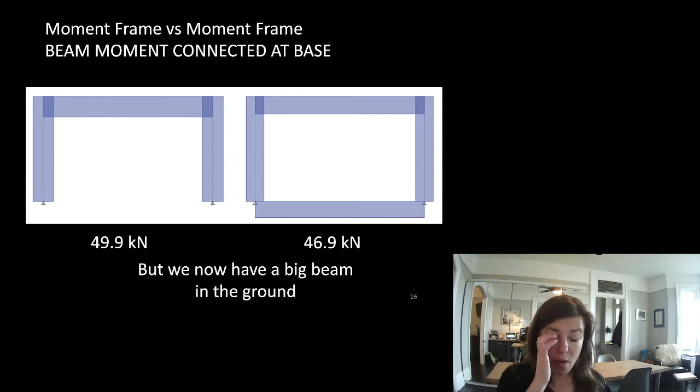Now, this is a great solution in certain circumstances. If we're trying to do a retrofit in an old building where there's existing foundations and we don't want to put the moment connection into that, and we want smaller individual members so they can simplify and do a field moment connection, this can be a really good solution. I've done this a lot on retrofits on old houses where they want to put a big bay window in the back.

Okay, remember I said we started with the premise that the reaction was equal at the bottom here. Next term, I am going to talk to you about the fact that stiffness attracts load. The stiffer something is in a system, more load will go to it than the less stiff elements. So the stiffer it is, the more load it'll attract. If these were both the same column, they would share the load equally, which is the assumption we made, that those were going to be equally stiff and share the load at the base. What if, for some reason, we had a narrower wall here and we had to hide this column in the wall? Or for some reason, we had a limit on what we could do here.

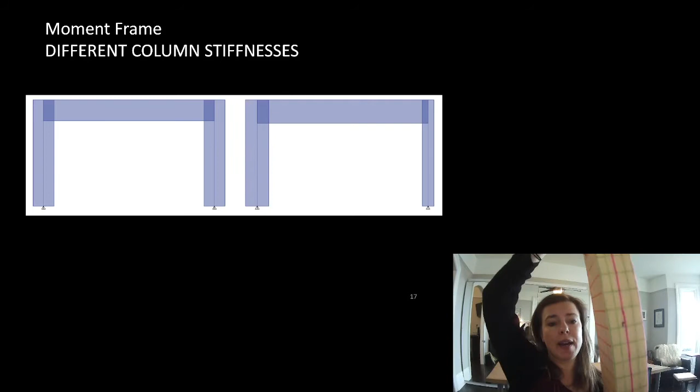You can see at a glance that if I try to bend this versus try to bend this, this is a lot easier to bend than this. So this is going to take more of the moment than this is. This is a much stiffer element than this, so more load is going to go over here.

Let's see what that does to our axial, shear, and bending moment diagrams. Well, look at the reactions here. It's hard to see, but here we have our 125 and 125. We still have our same up and down values here and here, but look at our base reaction: this one is 185, and this one is 65-ish, more or less, there's some rounding in there. But you can see that this one has a bigger base shear than this one. That would have a big impact on us tracking our axial force, our shear, and our bending moments through the frame.

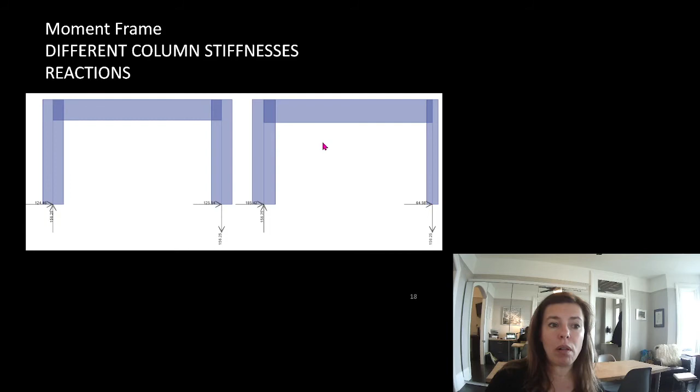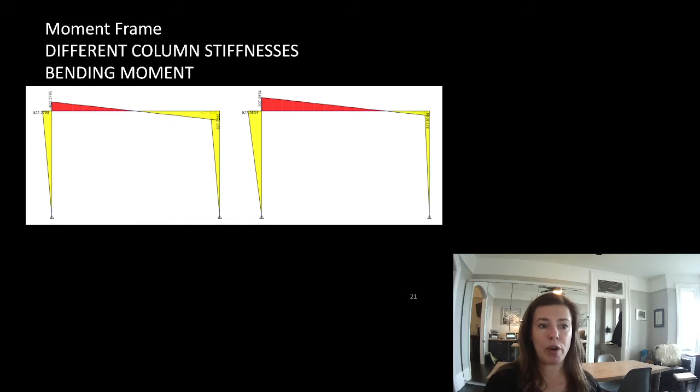We have way more moment at this connection than this connection because more of the load is trying to come out through this column. So we can play with moment frames to try to meet the demands of the design criteria. We still have to meet strength, stiffness, and stability, and moment frames are the worst case solution. But once we've made the decision to do a moment frame, there are ways we can manipulate things within it.

We talked about allowable deflections at the beginning of the term, and I just want to bring that back into the conversation. Remember that they were about comfort and preservation of finishes. They could have an impact on stability. If we deflected too much, once we get to a certain point, it starts to turn into a tipping problem, or what we call P delta.

Drainage, we can end up with a ponding problem, and it's about interface with building elements, so how our windows fit into our frames, for example. And I gave you guys some serviceability criteria for various materials, whether it was snow, dead and snow, live or dead and live, and whether it was susceptible to damage or not. Drywall, susceptible to damage. Plaster, very susceptible to damage. Glass, susceptible to damage.

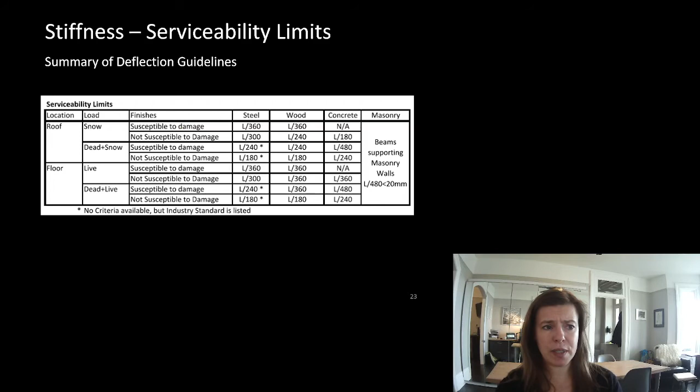So what I've done, and I'm not going to work through these for you right now, for people, there's a lot of you that have already got this in the bag and know how to do all of this, but I've given you more worked out method of section problems. And I'm going to tell you one of them looks identical to what most of you are going to do in your project part 2. I have provided worked out solutions for solving B4, column B4, RJ01,

RP02, RB11, and RB03. RB03 has a cantilever here, and these members are purlins that span from this beam to this beam, and then this beam spans to the tip of this beam. So there's a large point load plopped down at the tip of this member, so it's going to have an impact on the design. So I've gone through and done method of sections for all of these elements, so you can see some more worked out practical solutions.

Now, these ones I've worked out. I also just want to talk about so this is the framing set that I gave you guys as a typical building that is in no way typical because it does all kinds of crazy things and it's not what anyone would build. But it was really great because it expressed all the things that we could talk about structurally. On the second floor, we had...

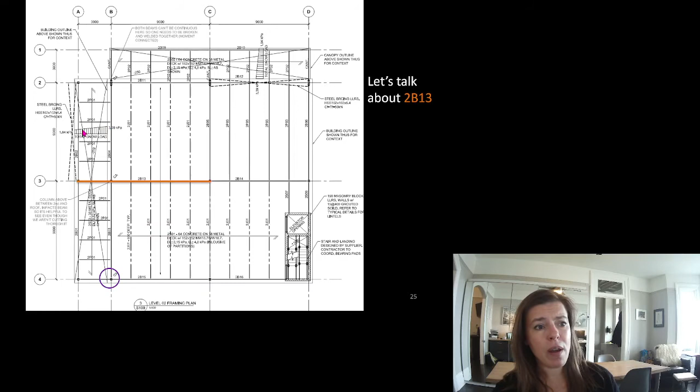Here's the worked out problem for the column, because this column is picking up roof load and it's picking up second floor load, with some of it being from the low roof and some of it being from the high roof. I've gone through here and worked out the tributary areas, which are different on the different floors and for different load types. So because this one has snow and this one has live load and this one has snow, it's going to have a different impact on the members.

So you can see I've gone through, I've figured out what all the loads are, and then for each section of the column, I figured out what the factored loads are. And I've looked at the different load combinations to figure out the worst case load. I've then drawn the free body diagram of that column. This is the foundation, so we're assuming we're stopping at the bottom of the column, and then there's something happening here with reactions that transfer out into the foundation. And then here is my axial force diagram. This is exactly what I expect to see in your project. Anyone who says they don't have access to what you need to do, beautiful example right here.

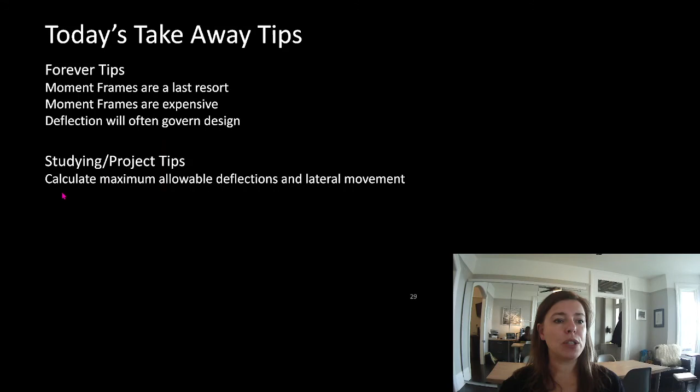And you guys get to assume the most simplified version of it, right? You get to assume it's a uniformly distributed load. So some good forever tips: moment frames are a last resort. They're expensive and deflection will often govern them. You should know how to calculate maximum allowable deflections and lateral movement.

So I just want to go back to that. So in the project, look what I've done here. Take a look at these. You can see that I've solved them, but I've also then written out what the allowable deflection is, or the maximum deflection we'd want to see.

This sets us up well so that next term we're looking at what's the capacity for shear, what's the capacity for axial, what's the capacity for moment, and what's the actual deflection, what's actually happening, so that we can compare all of those things. So we've now done half of all of those equations, all right? And next year, we're gonna look at the other half of the equation.